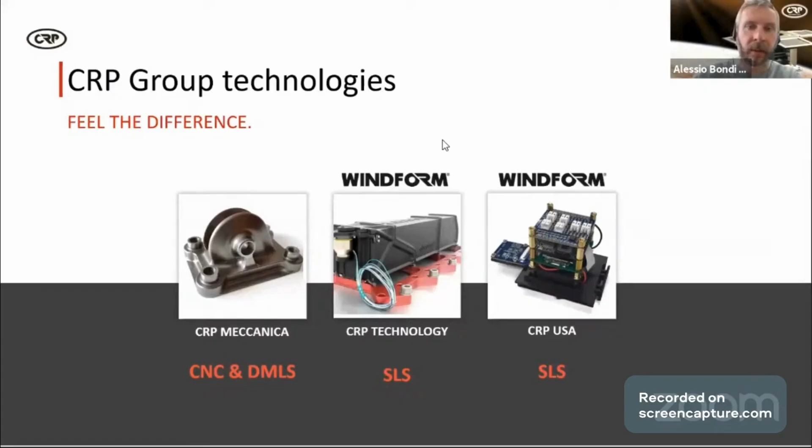Where we work, it's a mix of different industries, of course aerospace, which today we're going to talk about, then also avio or drones, motorsport, and automotive, and sports applications.

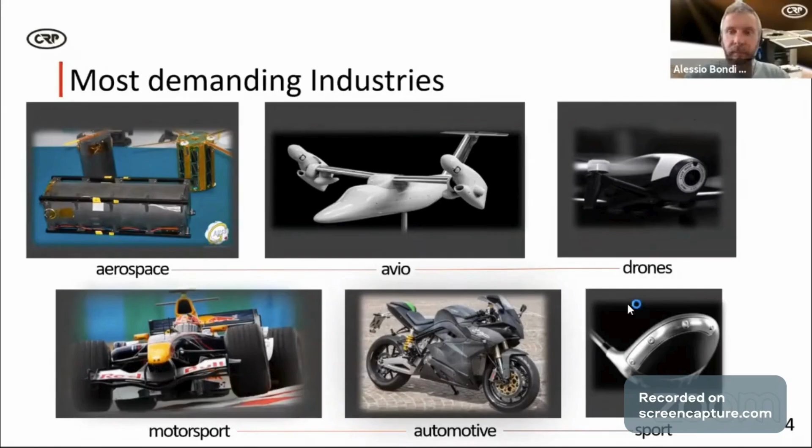Here, as I said, we're going to talk about our composite materials. Basically, we have different kinds of systems for printing. In Italy, we have 10 sinterstations, we just print in SLS technology. In the United States, we have 6 sinterstations.

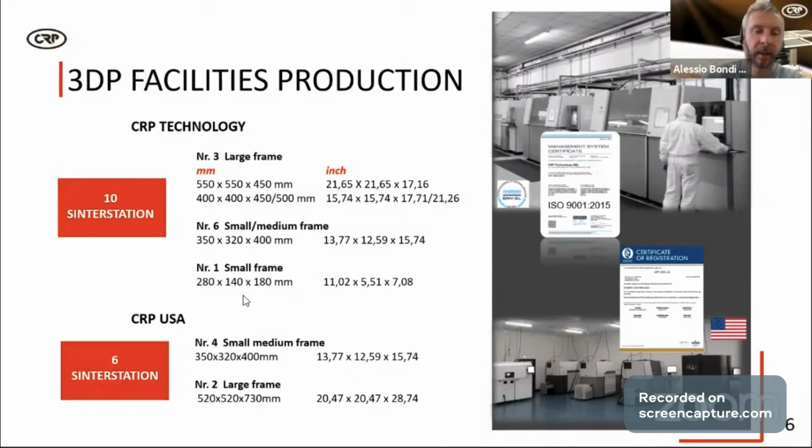Basically, it's a mix of what we call the large frame, so 550 by 550 by 450 height, to the small frame, which is 280 by 140 by 180 millimeters height of the machine. Between this and that, we have 400 by 400 by 450, and 6 small-medium, 350 by 320 by 400 height. In the United States, they have more or less the same capacity, the same size of our machines.

What are the benefits? What can we do with our 3D printing materials? First of all, it's total freedom. When you design a part and want to print it in 3D with SLS technology, you basically have almost no limits. You can produce parts with high complexity, very difficult to realize with traditional production systems. We have a high level of customization.

Typically, we have customers who do a small lot of one item, then make little changes to a similar item and do another lot. So every part can be really customized and printed to suit the specific application of our customer.

Then we have reduction in product and project realization timing, meaning that in a short term, let's say typically 24 to 48 hours, you go from a drawing to a part on your desk. So part of our success is a high-speed response to the customer in terms of quotes and also in terms of production, thanks to our capabilities.

What we can do is functional, space-ready parts and flight-ready parts, or structures or equipment applications that we'll see later, what really we can do.

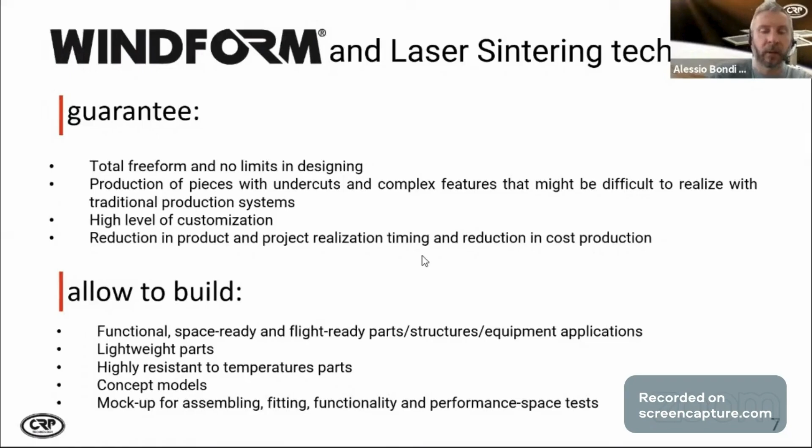We have polymer materials, all polymer materials, but we developed them with high temperature resistance, and you can use them for mock-up, for assembling, fitting functionality, and also to make tests before you launch.

That's an overview. You can always find all the information on our website, www.windform.com, where you can download mainly all the technical specifications, certifications, and all the related technical information.

We have basically 10 materials, 3 of them carbon fiber reinforced, so all are polyamide based, carbon fiber reinforced. 2 of them are glass fiber reinforced, 1 is aluminum fiber, 1 is pure polyamide, 1 is an elastomer, and 2 very interesting materials recently developed are flame retardant.

The main reason people choose this kind of product is strength and lightness, so very low density but good strength.

Space ready, especially our Windform XT, it's already widely used for space applications. We can do CNC machining thanks to our sister company CRP Meccanica. It's waterproof, and we have products which are already skin contact approved for other types of applications. We also have a material we can print with very nice and very good electrical insulation and good flammability response.

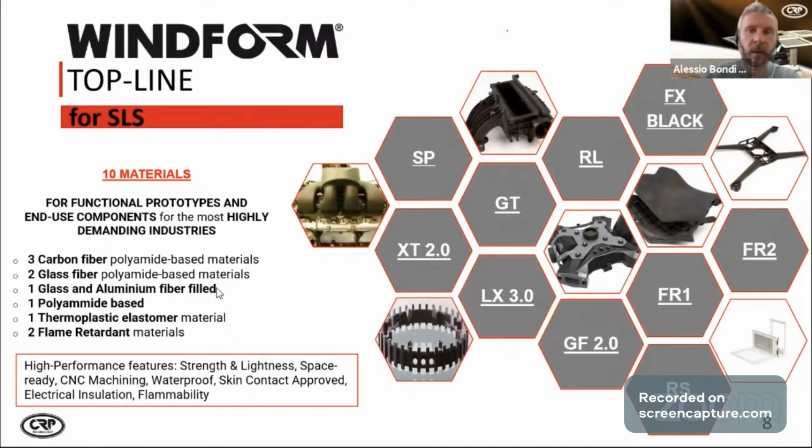Some examples of our top line. The space one is XT 2.0. You can see the density, it's just a little bit above 1, so 1.097 grams per cubic centimeter. We have a good HDT, it's a little bit above 173 degrees, and a UTS of 83-84 megapascal. This is widely used for space application.

Then we have a bigger brother, Windform SP, which is a little bit more heavy. Density is 1.106, but you see HDT is higher, 186. UTS is a bit lower, 76 megapascal, but there's a very good elongation at break.

At 11.38%. Then we have Windform GT, used for example for drone applications. We have many customers doing drones. You can see the characteristics, a little lower HDT compared to the other two. UTS is 56, but the main feature is elongation at break, which is 14.82%, and very good surface finishing, 1.45.

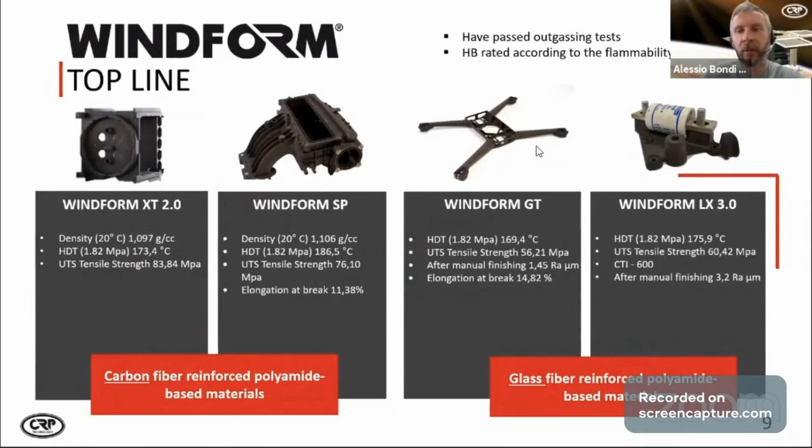As part of the family is the electrically insulated material, Windform LX 3.0, which has a CTI of 600 and very good HDT as well, 175, and acceptable UTS of 60 megapascal, and also good surface finishing. So the first two are, as you can see, carbon fiber reinforced, and the second two are glass fiber reinforced.

The second of the flame retardant family is Windform FR2, which is the only white material we have. All of our other materials are black. This is UL 94 HB rated and also passed the smoke density test. The FR1 is carbon fiber reinforced; the FR2 is glass fiber reinforced.

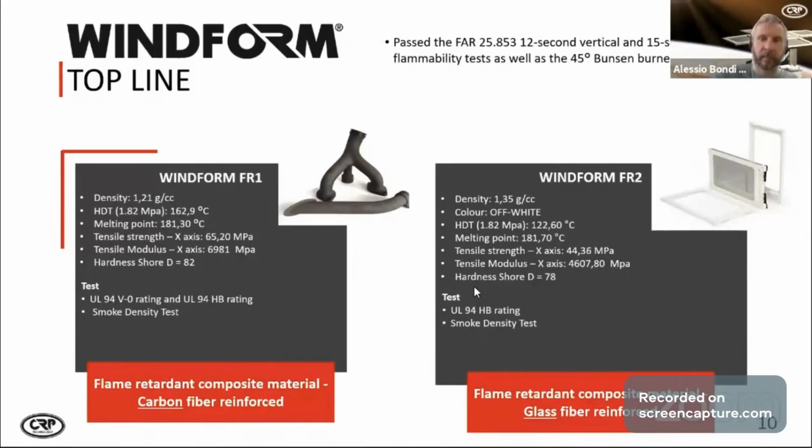Last born of the family is Windform RS. That's a very strong one, with a density of 1.21. You can see a very, very good HDT for a polyamide, for a polymer. It's carbon fiber reinforced, 191 degrees Celsius, and 197 as a melting point.

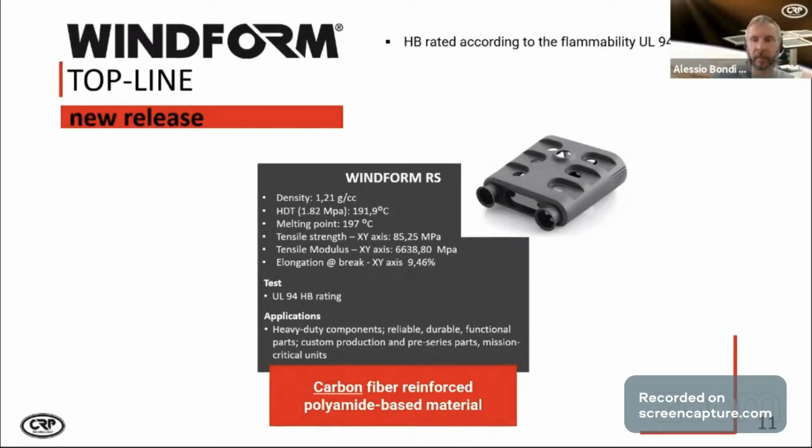Look at the tensile strength, it's 85 megapascal, and the tensile modulus is 6,638 megapascal. With an elongation at break of 9.46%, it's not bad. This one is very good for heavy duty applications.

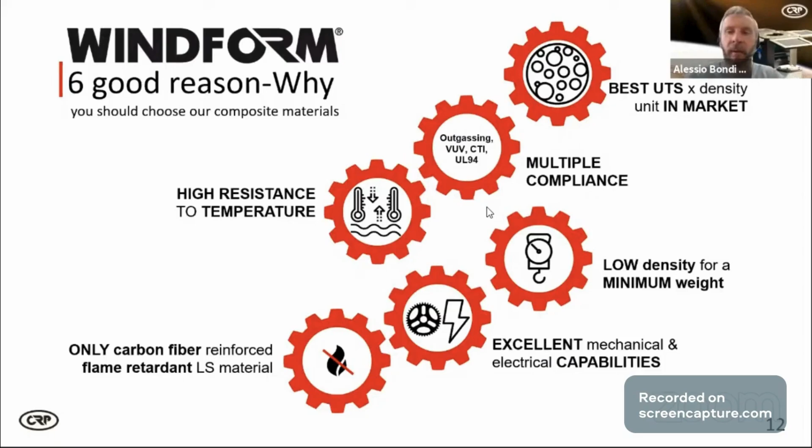These are the main reasons why customers and companies are considering Windform materials. You can say it's the best UTS-to-density ratio in the market. It passes a very important outgassing test, and also has very high CTI, and flame retardancy. So these are multiple compliances of our materials: very high resistance to temperature and low density. Some also have excellent mechanical and electrical capabilities, and it's the only material which is both carbon fiber reinforced and flame retardant. So Windform materials are really advanced for different kinds of applications where specific compliance is required.

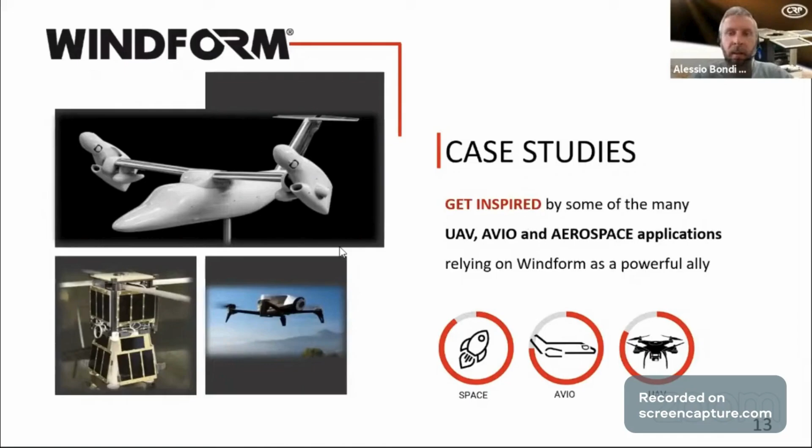A few case studies. Here we can see a few case studies from UAV, aviation, and aerospace applications. We start from this first 3D printed PocketQube deployer.

So we have the challenge: to develop an updated version of a space qualified 6P PocketQube deployer, AlbaPod V2, plus a moving ejection mechanism and door assembly. The solution was laser sintering technology using Windform XT 2.0. What the customer gets is a functional 3D printed PocketQube with a redesigned shell, improved especially in terms of weight and manufacturability. Consider that in less than a week you get the parts.

So it's really easy to access technology, and it also incorporates a number of safety features.

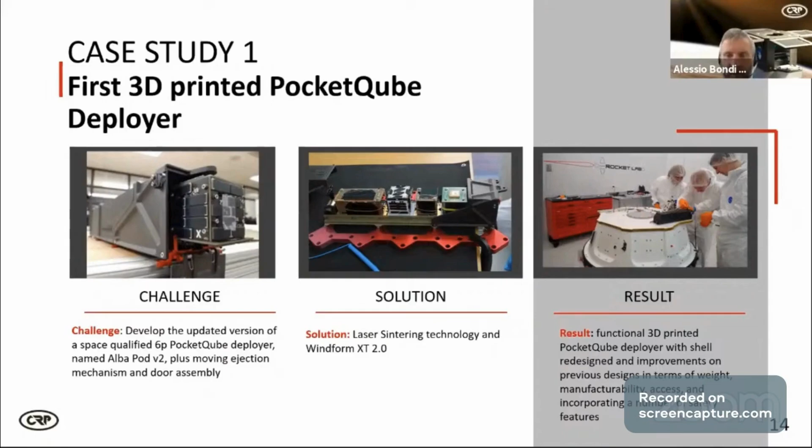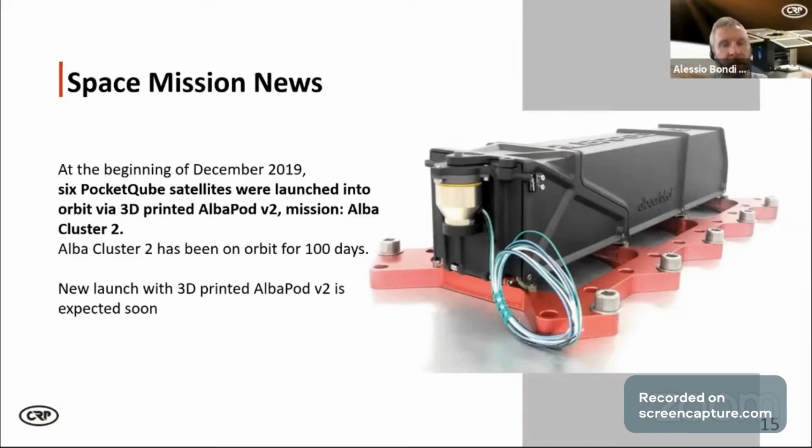The space mission was in the beginning of December 2019, in the pre-pandemic time. 6 PocketQube satellites were launched into orbit via the 3D printed AlbaPod V2 mission, Alba Cluster 2. Alba Cluster 2 has been in orbit for 100 days, and a new launch is expected soon.

In this case, we can see again a 3D printed 1P PocketQube, where the challenge was to build for the first time an entire PocketQube flight-ready space structure using additive manufacturing with carbon fiber composite. So this was the real first one. We got all the drawings, developed together with the customer, and then manufactured thanks to laser sintering technology and Windform XT 2.0, this beautiful PocketQube you can see here. It's fully functional, 3D printed, and space qualified with electronics, camera, and radio system.

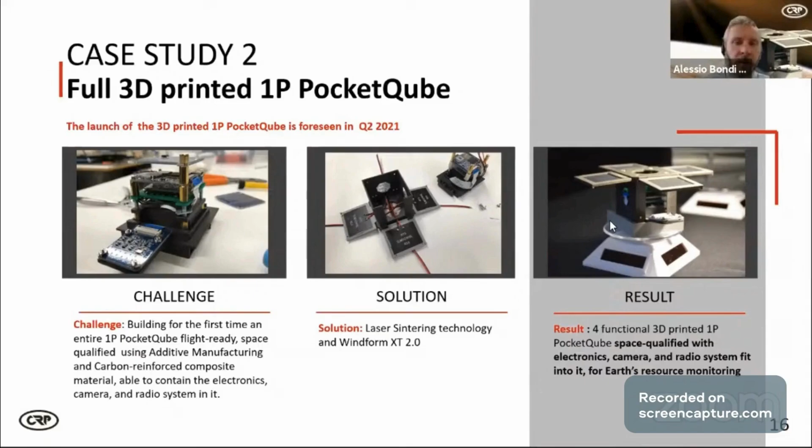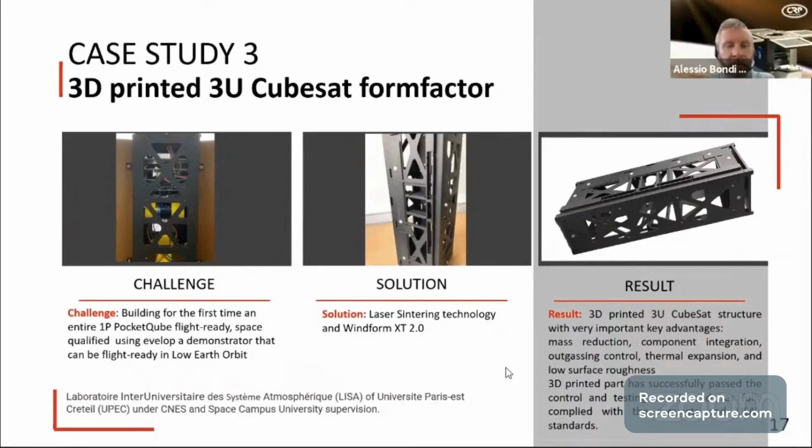So it's fully equipped. Again, another case, a 3U CubeSat form factor. Here the challenge was a demonstrator that can be in low Earth orbit. The solution was laser sintering, and the result is a 3D printed CubeSat structure, with important advantages we have seen before: mass reduction, component integration, outgassing control, thermal expansion control, and low surface roughness. All our materials have a very high surface finishing that permits this low surface roughness. This 3D printed part has passed the control and testing criteria and fully complies with the LISA standards, Université Paris-Est Créteil. We developed this kind of CubeSat with them.

Here, a little bit different. We developed with the Italian company Leonardo, which is involved in different sectors such as defense and aviation, a 3D printed wind tunnel model. So we developed all the parts, the nose of the cockpit, all of them in XT 2.0, and propellers. The challenge was to manufacture a scaled mock-up model to be tested, to test aero design solutions.

In this case, also the way it's very easy to modify the printed parts. So in case the engineer needs to modify some parts, we can reprint one and in few days send it back to them. The solution again was laser sintering technology, and the result was a complete mock-up ready for the wind tunnel, with a tilt rotor capable of simulating different configurations in flight mode.

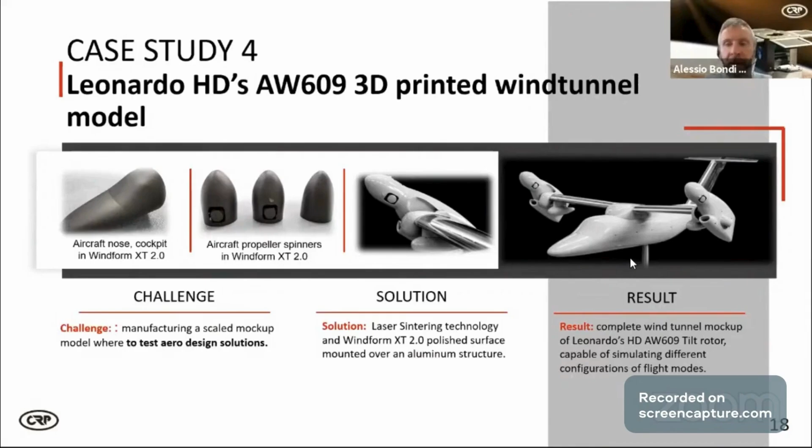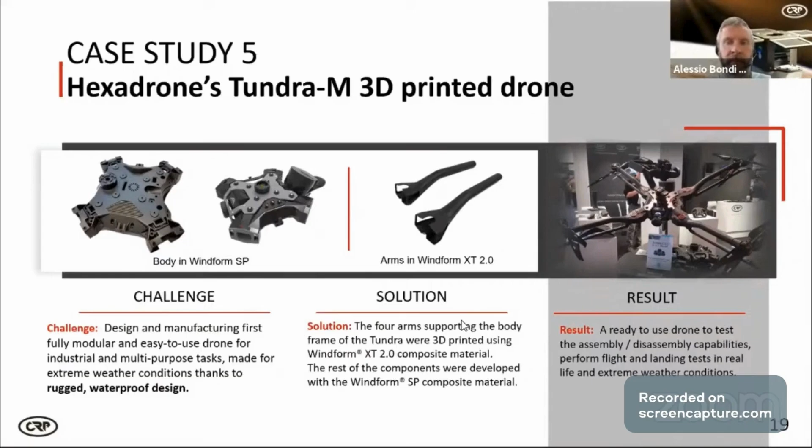So this one was the last one.